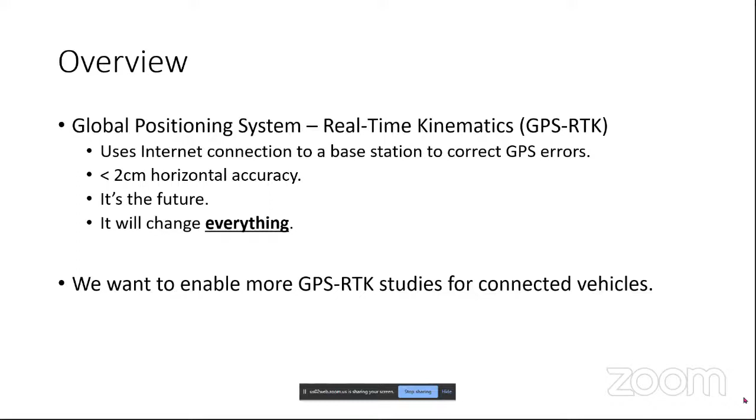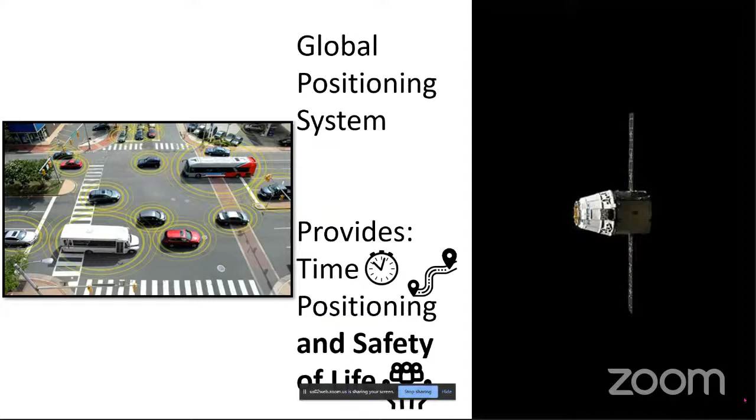So a little bit of background on GPS. We should all know this by now, that GPS provides time and positioning, all from the satellites whirling above our heads. But now GPS is going to provide a safety-of-life component when it's tied in with our connected vehicles. So those of you that don't know about the basic safety message, which was standardized by SAE a long time ago, they put GPS right in there. You can see the positional data for latitude, longitude, elevation, and positional accuracy.

GPS is so critical for the performance of our CV-DSRC radios, not just from the positioning point of view, such as am I going to hit the other car or not, or can I have preemption at the right time or not, but also for the actual lower layer where the radios communicate so they don't talk over each other. So GPS is very, very critical.

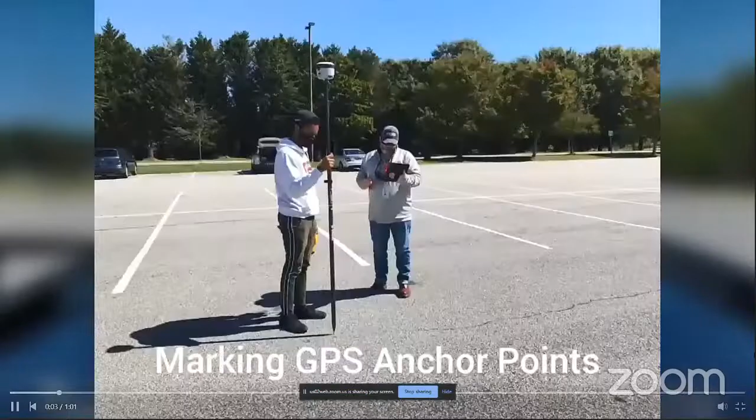But for this talk, we're going to talk just about positioning. We did a little study later last year, just asking, can commodity GPS be used for connected cars? So what we did was we went out to the Cobb County Safety Village parking lot, and we just did some basic tests where we took some anchor points with a very expensive high accuracy system, and we started driving through those anchor points.

So all those cones, we actually got really, really high precision markings there with about an $8,000 to $10,000 equipment loaned from the City of Marietta Water Department. And then we strapped onto our logging equipment just a basic USB GPS dongle, put it on the roof.

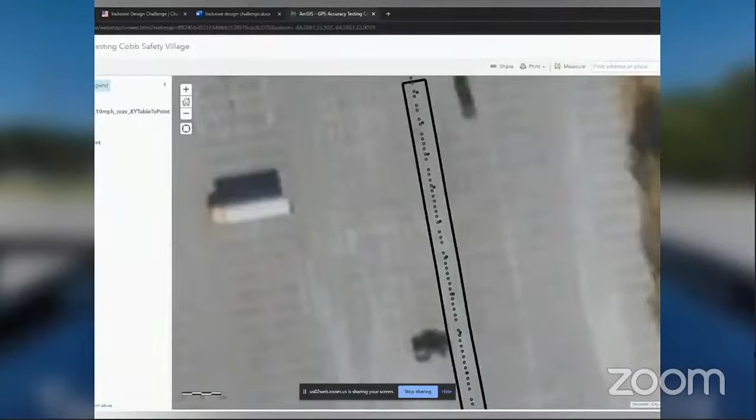We wanted to compare it against an accurate GPS module found in an older DSRC radio. Notice we had a clear sky, and we drove the car through the points, and that's what we care about. The black box there was where our anchor points were, so we looked at where our points actually landed. We can go to a zoomed in spot here. All the little light dots, that's from the accurate GPS, and the dark dots, that's from the commodity GPS.

What we wanted to make sure was that there wasn't any positioning falling out of bounds of this black rectangle here. So that was pretty cool. It's like, wow, okay, maybe commodity GPS isn't so bad after all.

But we wanted to go a step further because we started hearing about this technology called GPS RTK, which provides less than 2 centimeter horizontal accuracy. This is mind-blowing, okay? Let's look at the use cases as defined by the 5GAA. They did a wonderful study, put out a great white paper. I highly recommend, if you're into this stuff, to go read it.

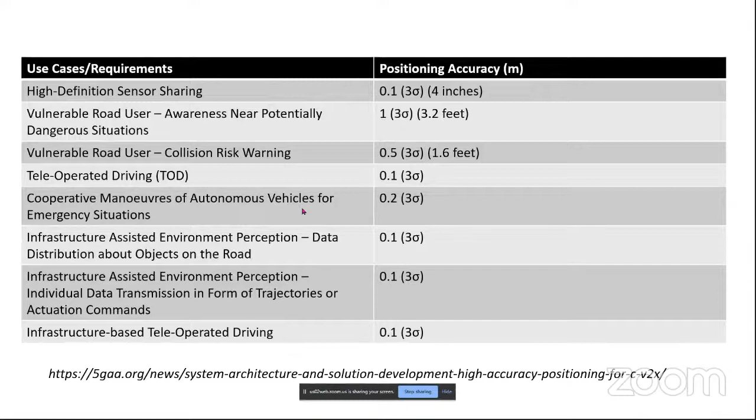When you hear RTK, just think that the GPS modem on the vehicle is making a phone call to a base station asking, hey, this is the position I'm in, does that look right to you? And the fixed base station will talk back over the internet and say, yeah, that looks about right, or no, you're off a little bit, here's by how much.

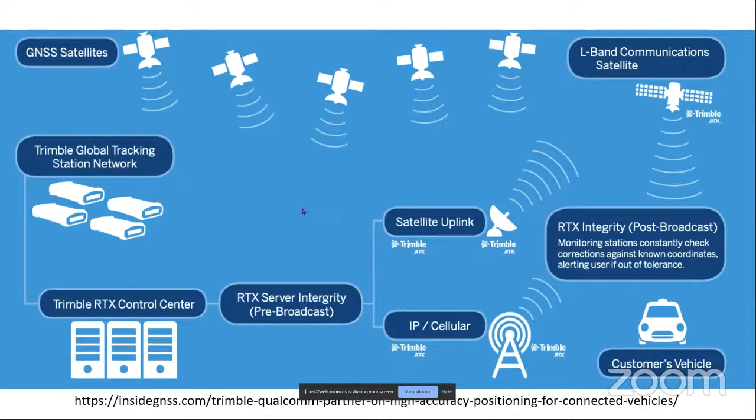So at a very high level, this is what you can expect for connected vehicles. You have a fixed base station that you're driving by, and it's talking over the internet and sending those correctional data to the rover part, which is what we call them rovers when they're actually on the connected vehicle. You can receive those through any type of communication link as long as it's connected to the internet. So it could be a CV2X RSU that's deployed, or it could be a cell base station going over 5G, 4G LTE, even 3G.

This is very low data rates we're talking here. These correctional messages, you're talking about 2 to 6 kilobits per second, okay, is all you really need. So it's a very, very low bandwidth requirement.

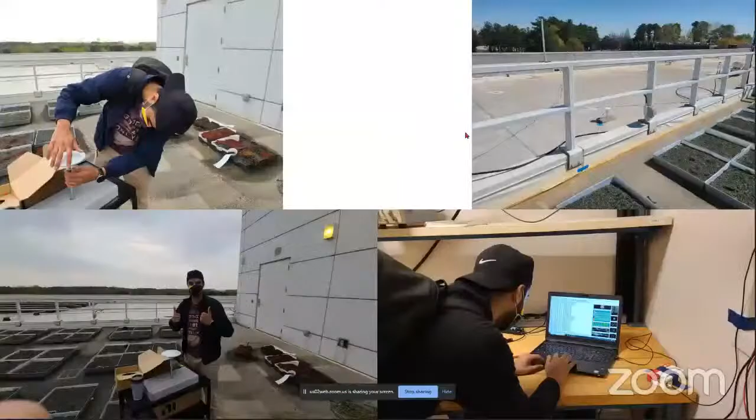Now let's go ahead and set up a base station, an RTK base station. There's my student Mohammed, he worked with me this semester setting this up on our engineering building. And boom, look at that. That's 14 millimeter horizontal accuracy with just a cell phone and a $220 external GPS receiver. And the base station wasn't that expensive either.

So this is what we're talking about. Actually, this data point was done with a little deployment outside of my garage. That's how accessible RTK is, and this is why it's a big deal for us in ITS: these high accuracy position services are no longer $8,000, $10,000 a pop. These things are coming down to below $500.

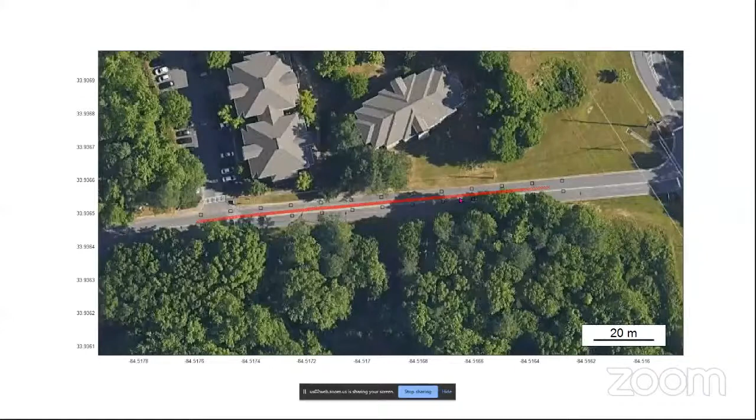By the way, as we know, all the chipsets are based on the Qualcomm 9150, at least as far as I know right now. I'm sure there are some other reference designs, but the GPS for CV2X is built into the actual chip - it's not an external component. You can kind of see where it's doing some interpolation here, trying to estimate where the car may be.

And then right here in the middle, this is where the RTK system is. You can kind of see the big difference here: you are lining up almost exactly in the middle. I'll keep flipping through here. When you go back and watch this later, you can pause and look at the slides and compare against some of these other commodity devices.

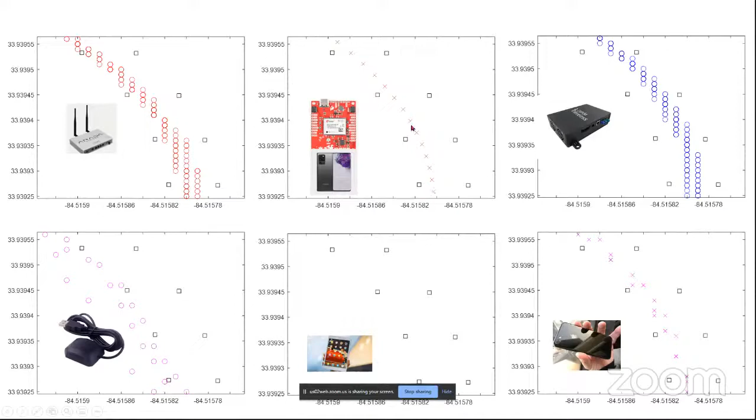So here we are around a curve. Again, RTK is just rocking really well. If you zoom in a little bit, you can see how our CV2X radios are kind of interpolating here. So there has to be some extra post-processing, whereas with RTK, you just get immediate behavior there and very high accuracy. And then finally went up a hill - again, we're tracking really nicely, even on an incline, which is pretty cool.

So going forward, we want to deploy more base stations. We want to study the expected coverage here in the Metro Atlanta area. We want to study these corrections over a CV2X RSU. And then we also want to apply this technology for dynamic work zones, where someone takes that monopole out there, marks high accuracy positions for all the traffic cones, and then the RSUs broadcast those to autonomous vehicles.

Anyways, that's my talk. Thank you so much, and I look forward to hearing some questions.

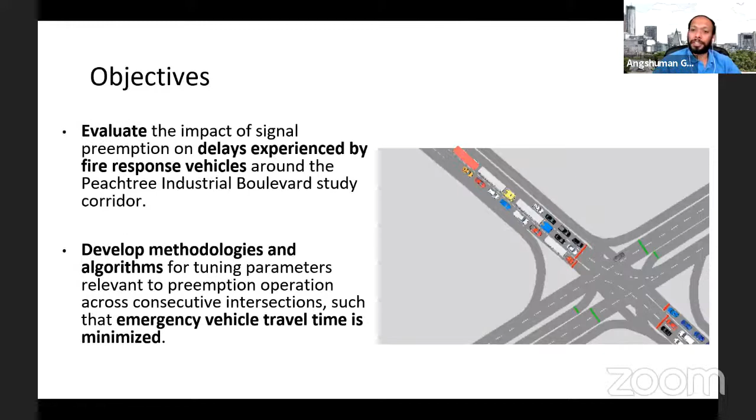To understand how much impact there really is from holding the greens, we went with a simulation approach. We built a software-in-the-loop simulation with exactly the same signal controls that are operating in the field. We calibrate and validate the model, create and test the baseline scenario with naive preemption, and then test multiple different scenarios to figure out a strategy that will give the optimal solution.

Our VISSIM model covers a 6-mile stretch of PIB, Peachtree Industrial Boulevard, between Holcomb Bridge at the south end and Pleasant Hill on the north end. It also includes some signals one intersection away from Peachtree Industrial Boulevard, as you can see here. So there are a total of 25 signals in the model.

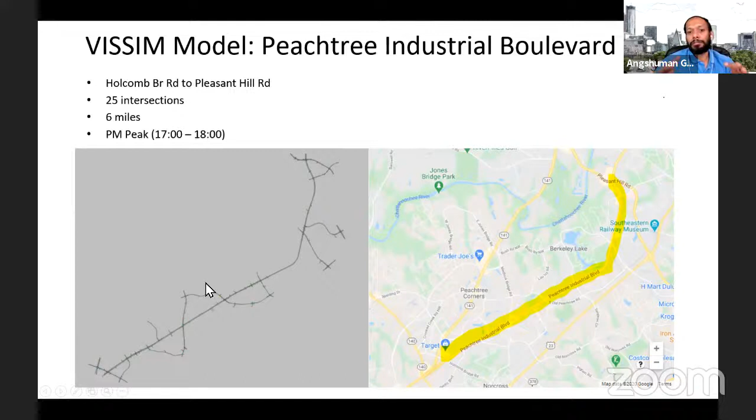We are modeling the PM peak to begin with. For calibrating the model, we used volumes to begin with. We obtained historic volumes from multiple sources for this purpose, including counts by processing the on-off signals received by the loops, by the signal controllers from the field detectors.

This data was obtained from the MaxView database, which contains the 10 Hertz data of signal controller events. This was supplemented by volume counts from the ATSPM system maintained by GDOT. However, we have count loops only on the main line in most cases, so the volumes on the main line were calculated from these count loops and were accurate, especially for the through movement.

But the volumes on the side streets came from presence detectors, so we expect them to be underestimates of the real volumes. So we supplemented this with historic turn counts, which were available at some intersections but not everywhere.

Once the calibration with the volume was done, we also calibrated the model with travel times obtained from the INRIX data, which are probe vehicle data. Next, we validated this against some GPS data we collected back in 2019 before the pandemic.

We had deployed some equipment in 17 of the emergency vehicles from 6 of the fire stations around this corridor. These were deployed over a mix of vehicles, including fire engines, ladder trucks, and med units. These reported GPS data every 2 seconds, so we had very high fidelity data over a 2-month period.

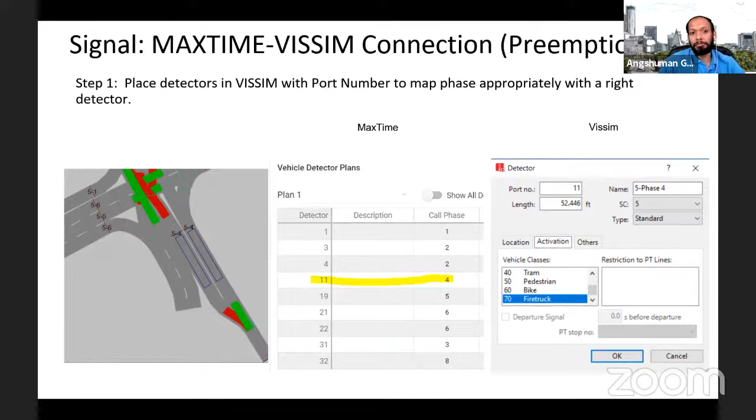Here's a short demo of how it works. On the left, you see the VISSIM interface and the vehicle movement at the intersection. On the right, you have the display of the signal state in MAXTIME. In VISSIM, you can set up the signal state visualization as well to see the signal state. Right now, we have the green on phase 2 and 6. There's no preemption call.

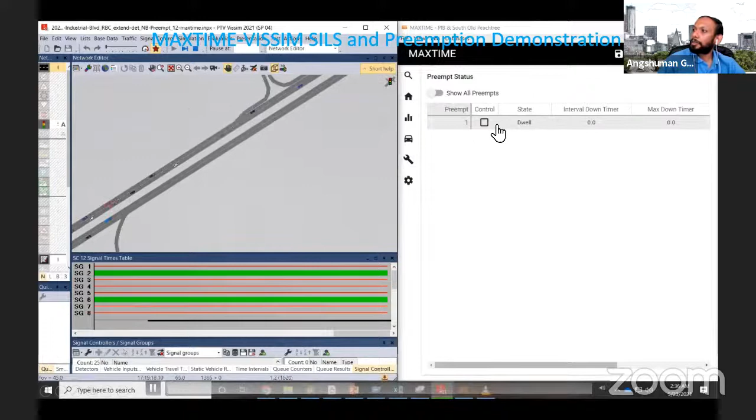If we give it a second, we'll soon see a preempt call coming up. I'll let it play out. Or maybe just move it forward. So here, once the preempt call has been placed, we're moving this here to find this emergency vehicle. The yellow one is the fire truck there.

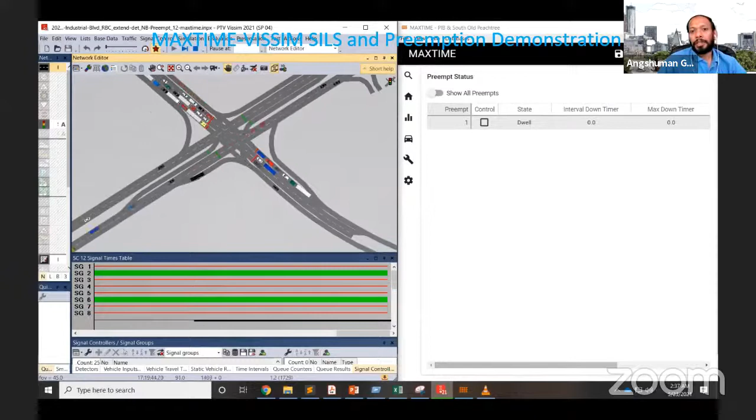Based on the limits of the DSRC radio, we made the detector about, so right now it's the whole approach to the intersection, but we're going to reduce it to 1,000 feet. As the engine crosses the intersection, we'll see that this preempt call will go into the exit phase started mode, and then it goes away and the signal goes back through the recovery and resumes normal operation after that. For our model, we did a preemption in VISSIM as well.

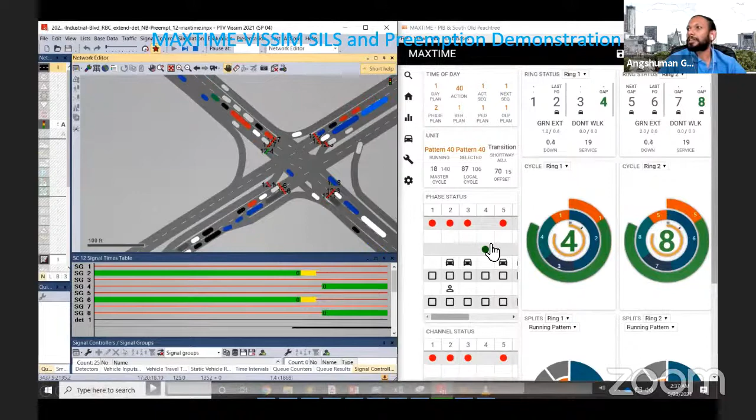Okay, this started playing it all over again. Let me see if I can go to the next slide. Yeah, skip through that. So this one is a demo using VISSIM's RBC, the ring barrier controller.

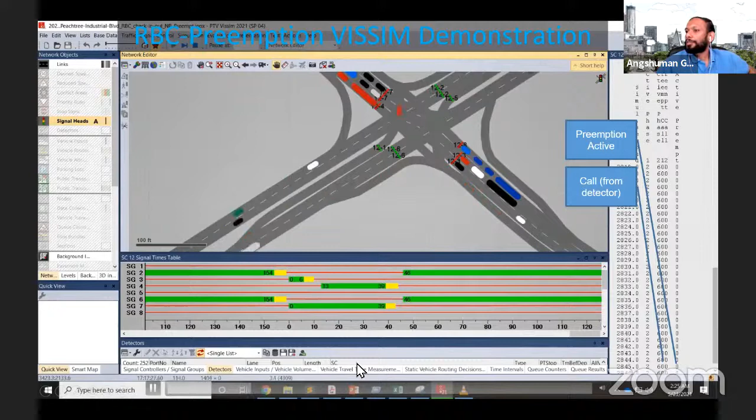And if it cooperates and plays, there we go. So in this one, we can see the call from the detector in this stream and the preemption active right here. I'll move this forward a little bit so we can see the detection come up here. You see a 1 here, and it goes into the preempt. We'll again see the emergency vehicle in here. There we go, that's the yellow vehicle.

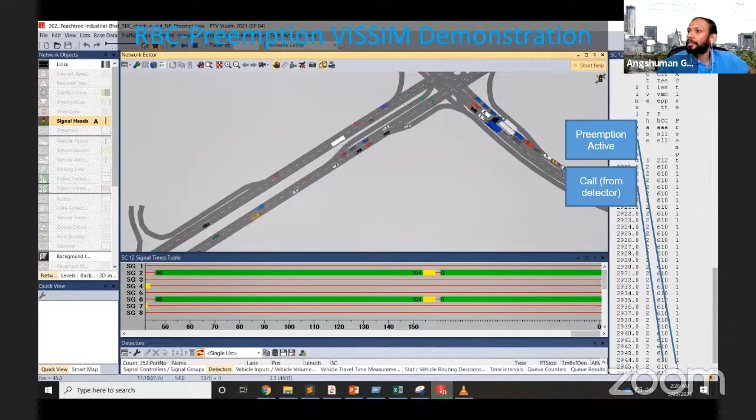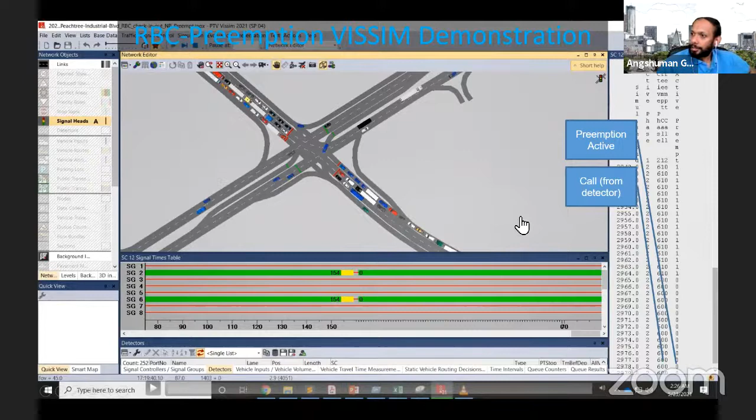And in this one as well, we'll see that as the vehicle crosses the intersection, the detection goes away, followed by the preempt signal going away, and we take the green away from phase 2 and 6 and give it back to the other cross street. All right, let me keep going.

Sorry. So next, here is a comparison of the trajectories of the emergency vehicle going through the corridor. As expected, you'll see that the vehicle avoided getting stuck at the intersection with the preemption. On the left, this is without preemption. On the right, it's with preemption. So we see that the vehicle avoided this red in the case with the preemption.

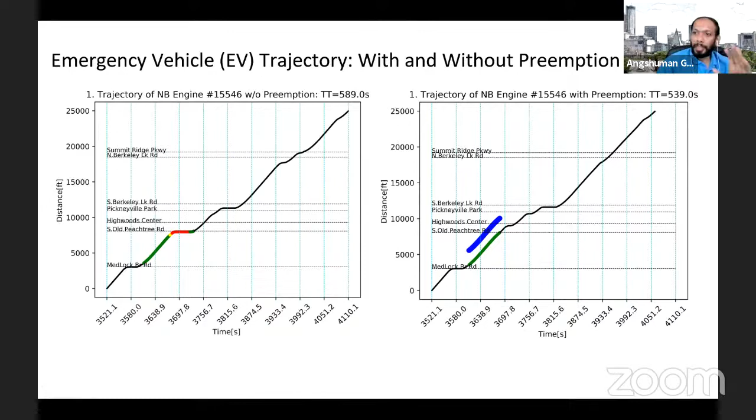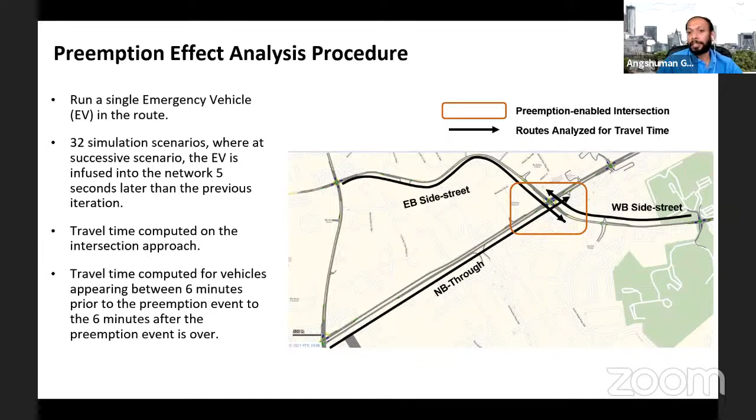And just a sanity check to see that what we are doing makes sense here. So we did several runs to put some confidence bounds on the travel time savings with slightly varying conditions. We made one vehicle go through the signal by approaching at different times within the cycle. We computed the savings limited to the travel time on the approach to the intersection and within about a 12-minute window around the time the vehicle crossed the intersection. So it's a box plot of the travel times.

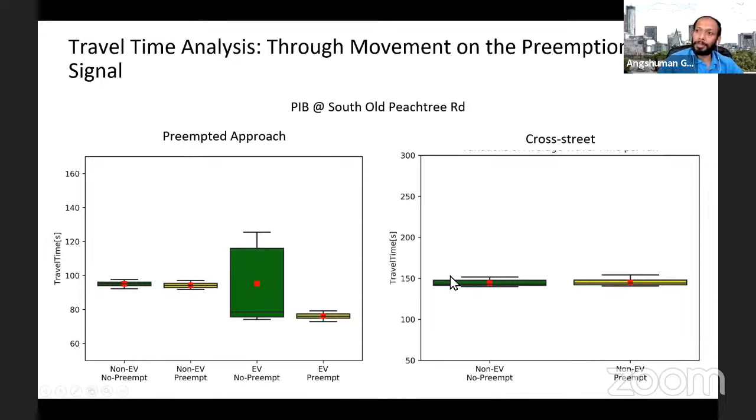Next steps: we are going to add the preemption, or enable it, at all the intersections on the entire corridor, complete the baseline, and study different scenarios for making the system dynamic by making the time of start of the preemption responsive to the estimated queue lengths that need to be flushed ahead of the emergency vehicle, instead of the static approach we have right now with fixed detector lengths. All right, I will stop there.

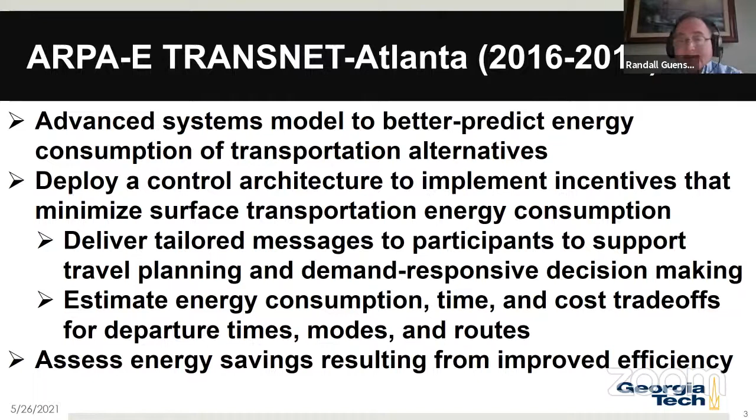So we had to estimate energy consumption, time, and cost. That's the cost of owning and operating your automobile, the cost of your transit fare, the cost of parking, and all of those were included in the model. When we talk about the Dijkstra algorithms and the use of impedance, those were costs that were all included. All the costs were converted to time, and then we'd assess the energy benefits from providing these incentives.

The traditional shortest path routines that you get, like when you get into your car and ask your app, give me the shortest path to work, and it says it's going to be 30 minutes by this pathway. The problem with a lot of the apps is they're using current speeds reported by travelers, what we call streamlines on the network, and projecting your travel time based on what people are currently experiencing. That gets us to the 30-minute commute dilemma where, 10 minutes into that trip, you look down at your app and it says it's going to take you 30 minutes still. That's because congestion wasn't explicitly accounted for in the algorithm.

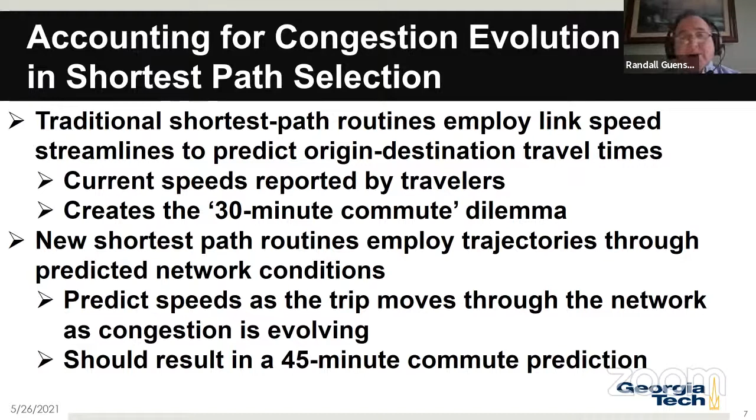So newer shortest path routines are employing trajectories through predicted network conditions, so that on your pathway, in deciding which route you're going to take, if you've got a 40-minute travel route, 15 or 20 minutes into your pathway, the app is predicting what congestion you're going to be facing on that route. Congestion could be forming, but could also be dissipating. There's no reason to take a longer circuitous route if congestion is going to dissipate by the time you get there. So the idea is to predict speeds that are changing in the network, and hopefully, in this case, when you ask your app, you get a 45-minute prediction.

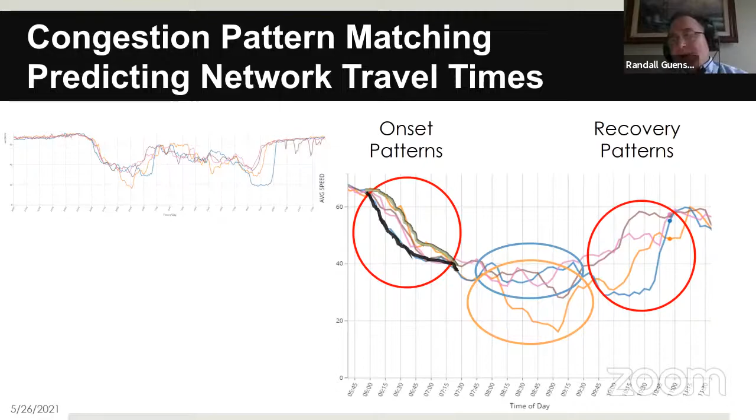Now, congestion does follow some predictable onset patterns. I've got to thank Guin for this slide. Guin works a lot with the Navigator data. We have a repository getting the 20-second data lane by lane. You can mine these data sets to look at how congestion is forming and how it's being relieved. The concept here is, if at 8:10 I see congestion upstream on two freeway links that's starting to flow backwards towards my location, I can know in advance that by 8:30, since I've seen this happen over and over again, it's recurrent congestion, that I'm going to be driving at 20 miles an hour on that stretch.

And so that brings us to the regional space-time memory that we developed for the ARPA-E project.

It's a repository of on-road operating condition data. It's at 5-minute resolution. It doesn't really do any good to go at a more refined level than 5 minutes. Traffic signals and signal timing and all that kind of prevent you from doing anything useful if you go down to the 1-minute level. And we're retaining all of this data link by link.

The cool thing about the overall space-time memory is it's structured so we can take data from any source. In other words, with machine learning applications, we really don't care where we get the data. What we care about is how good those data are for predicting future conditions. So obviously we have the navigator data feeds that we're getting for the freeway links.

We have some arterials that come in there. We worked with AirSage in one of the projects using cell phone tracking data for speeds. Bluetooth and wireless monitoring data can be integrated. We even can bring in second-by-second data from an instrumented fleet, process that, store it, which we did for the Commute Atlanta project before that.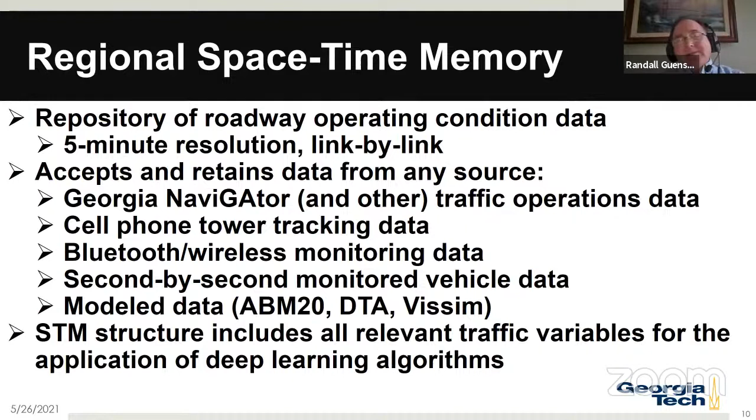And then bring those speeds in as observational speeds. But also another important thing is you can use modeled data. So we can use outputs from travel demand models, dynamic traffic assignment, microscopic simulation to look at potential conditions that we haven't seen in the data set yet that we believe could occur in the future. And we're tracking all the relevant data fields that we need: speed, volume, fleet composition, and the like.

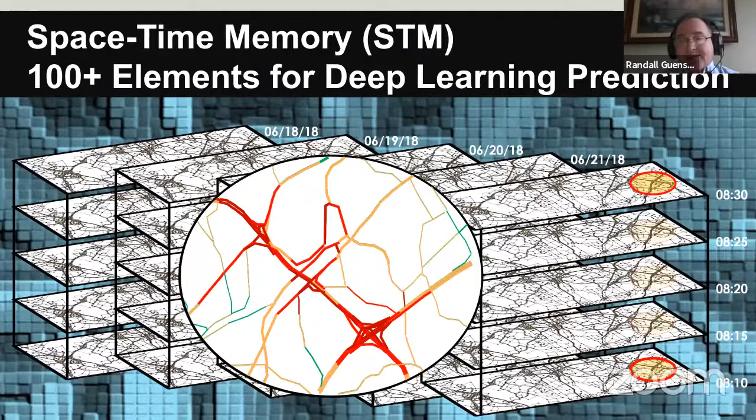And so the idea is that, at 8:10, I'm seeing these conditions on the roadway, but I'm also seeing what happened in 5-minute slices beforehand, and I'm projecting what those travel times are going to be moving through the system. So now, instead of using the streamlines, I can actually use shortest path algorithms that move in time and space through the space-time memory. We use for this the roadway sim and transit sim modules that we developed.

These are just Dijkstra algorithm processes for networks. We were using the 203,000-link travel network for the Atlanta Regional Commission's ABM model. That was a 2015 version. We're at about 150,000 links now. We're getting that all set for the next project.

We also brought in all of the MARTA fixed rail routes and bus routes and express bus routes so that we have connectivity between these networks. Roadway sim and the STM, which is projecting congestion over time.

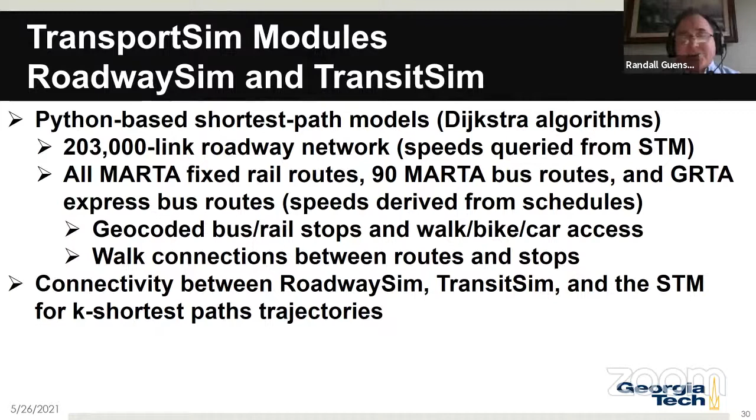We kind of cheated on transit sim. We just assumed that the buses followed their schedule and there was enough padding built in so we didn't also have to try to bring in the congestion with the transit, but it's something that could be done in another iteration. And so for ARPA-E, we use the space-time memory to do predictions of alternative routes, alternative departure times, bus.

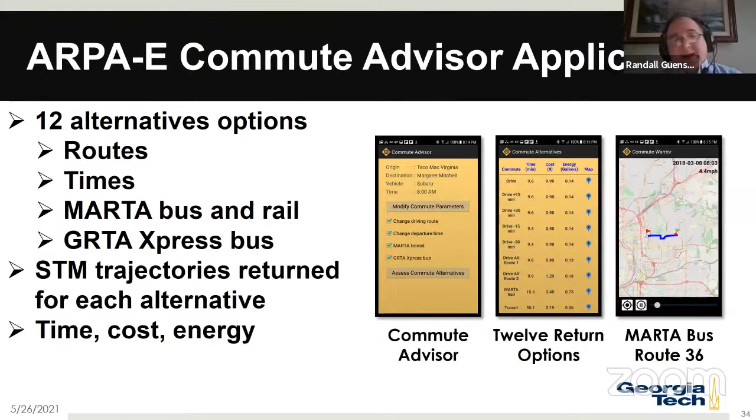And both park and ride and transit-only options. And you get the STM trajectories that are returned, and we can calculate the time, cost, and energy for each of those. And so, for example, for a commute from Sandy Springs to the Bank of America building, your Route 1 direct drive to work is 26 minutes.

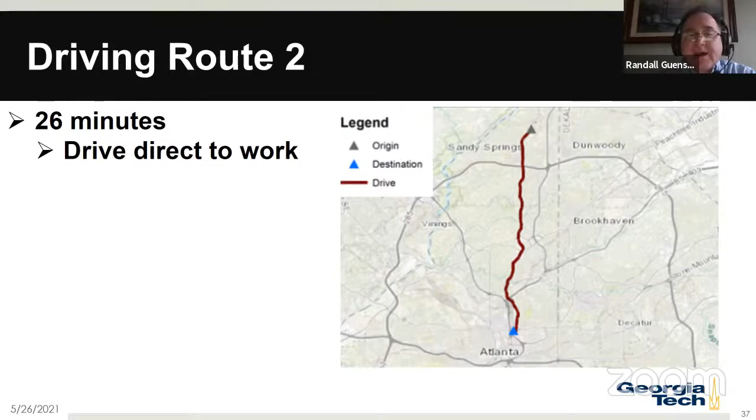Your Route 2 alternative is also 26 minutes. It's a slightly different route when you reach the 75 and 85 Y there. And then you have a one-transfer route on transit only. That's 44 minutes. That's walk to bus, ride on the bus, walk to rail, ride on the rail, walk to work. Here you've decided to walk to the rail, so it's a 70-minute trip.

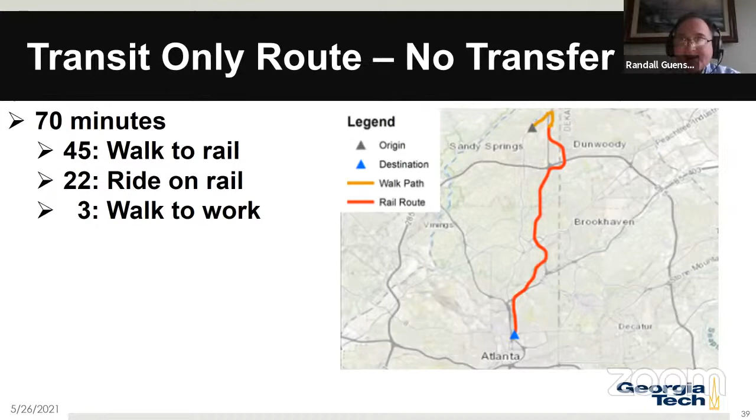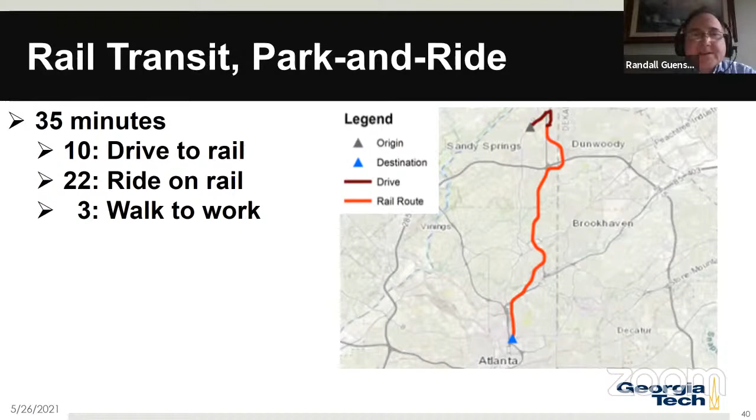And I took out the express bus option, which sends you out up 85 past Brookhaven to catch an express bus up there, because there isn't one that serves that travel. Here's one by Park and Ride, which is 35 minutes. So that's kind of that reasonable compromise between driving directly at 26 minutes and taking your transit-only options.

So Sidewalk Sim is essentially another shortest path calculator. It really doesn't matter what network you have. It can be a communications network, a pipeline network, a roadway network. And in this case, what we're doing is we're developing the pathway network for sidewalks and pedestrian pathways, so the places you can walk or roll a wheelchair.

And we're incorporating sidewalk features with this. So it's not just the sidewalk links, but it's ramps, curb cuts where the driveways come across the sidewalks, crosswalks, and their relevant attributes, both in terms of design standards and condition data. So, is it traversable by a wheelchair?

This is the thing to think about, because we're headed into this ITS for Us project to work with the disability community on shortest path, complete path routines to get from your home all the way to your building and inside the building you need for a public service. Same procedures, same model really, just different cost functions.

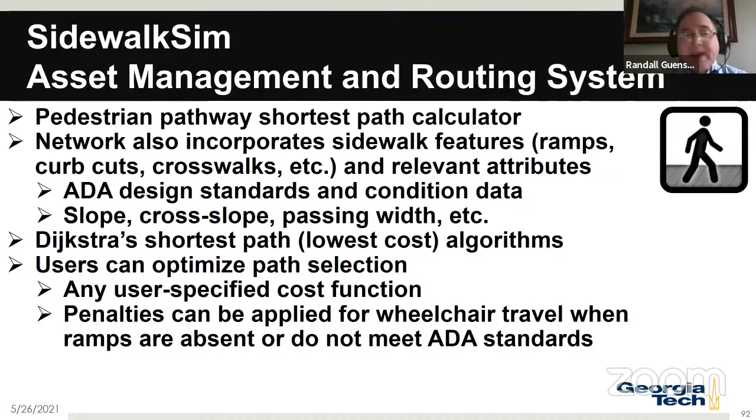So now instead of just travel time on the links, you can bring in cost penalties for ADA design standards that are not met, or sidewalk conditions that are impassable or difficult to pass by a specific ADA mobility mode.

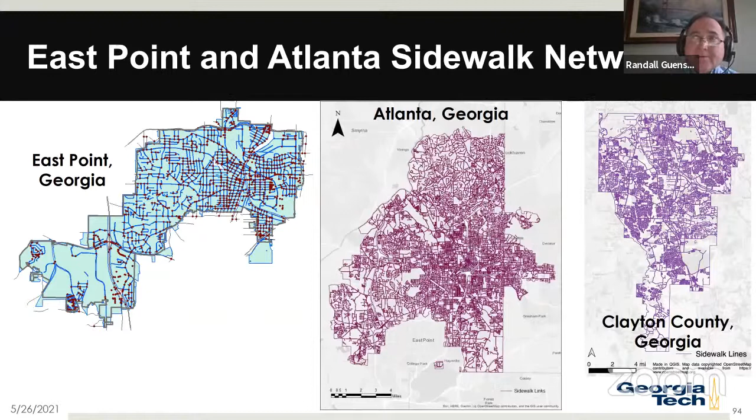We've developed networks for East Point, City of Atlanta. We just finished the Clayton County, Georgia network, and we've done some for Cobb County. We'll be doing the network for the southern end of Gwinnett County for the ITS for Us project.

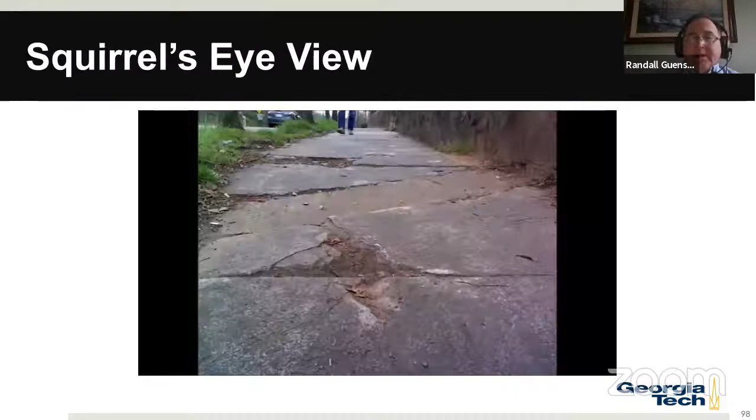Once you have your networks, you've got to inspect them. We have a couple of different tools we use for that. One is Sidewalk Sentry, a rolling video setup where we can record information about the sidewalk.

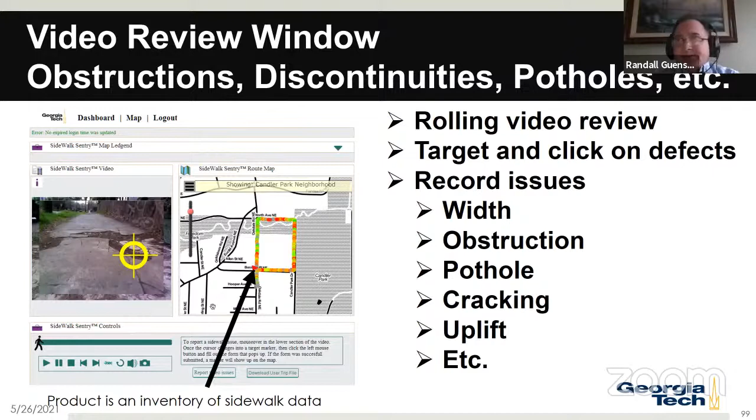You're getting vibration, XY position, and also a video archive. That video archive can be scored by reviewers, where you can identify problems with sidewalk width, presence of obstructions, potholes, or cracking—anything you want to ultimately assign a penalty to. We use the traditional ADA design standard specifications for that.

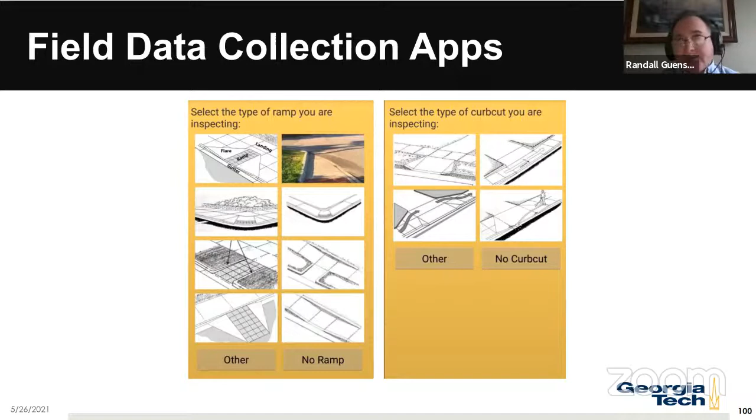You can also go out with other apps—this is our Sidewalk Scout app, which we use to inspect the ramps and curb cuts, making sure design elements like cross slope are acceptable. Cross slope is a real problem if you're in a wheelchair; it can send you turning towards the street as you're coming across the network.

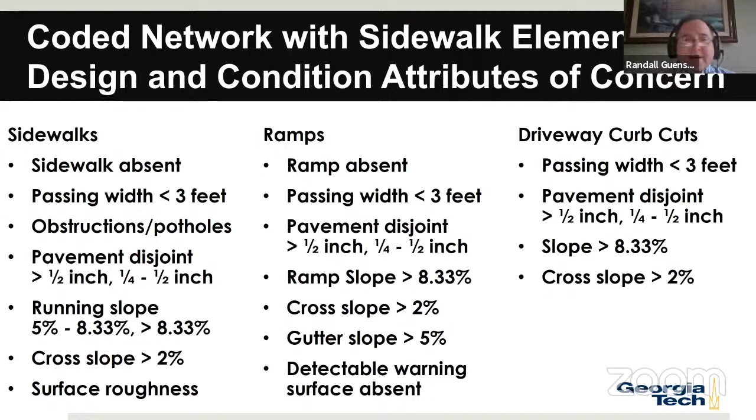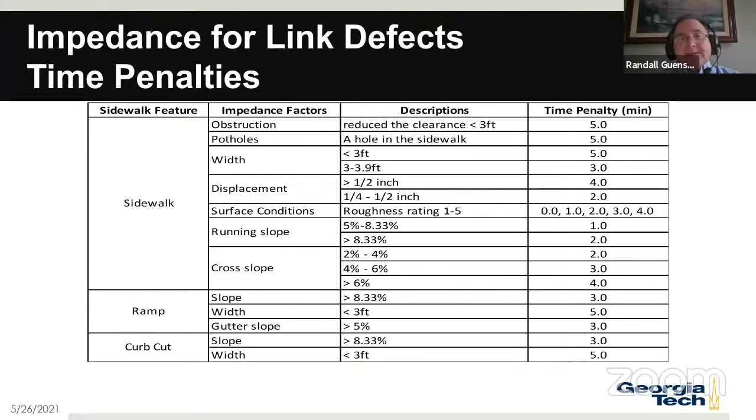As a demonstration, a grad student did this project in December as research last semester, looking at individual problems like inappropriate passing widths and cross slopes, and assigning time penalties to those. This is the application for the Ansley Mall neighborhood she did for her project. She assigned time penalties ranging from 5 minutes to 1 minute across all these different variables.

As a demonstration, she coded the network and assigned random penalties to these. We don't have all of these networks inspected, but we do have most of Monroe for the City of Atlanta project, so we can actually use the individual penalties for that.

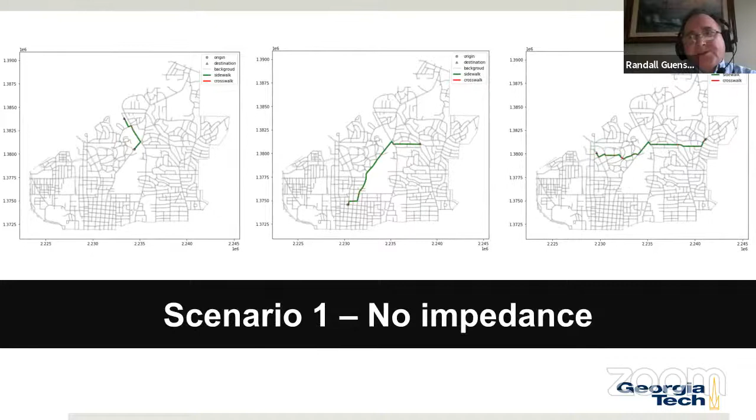But here she applied no impedances—this is just the impedance for sidewalk surface roughness, so you're not seeing too much diversion there. When you bring in all of the other impedances, though, you can see some real circuitous routes you might have to take to get around major defects that can't be traversed by a wheelchair.

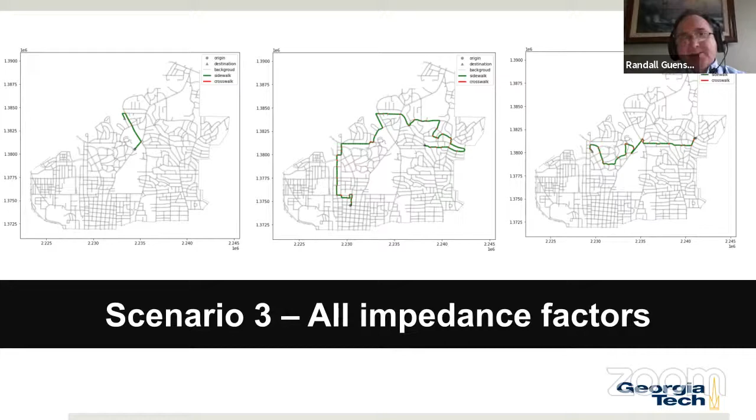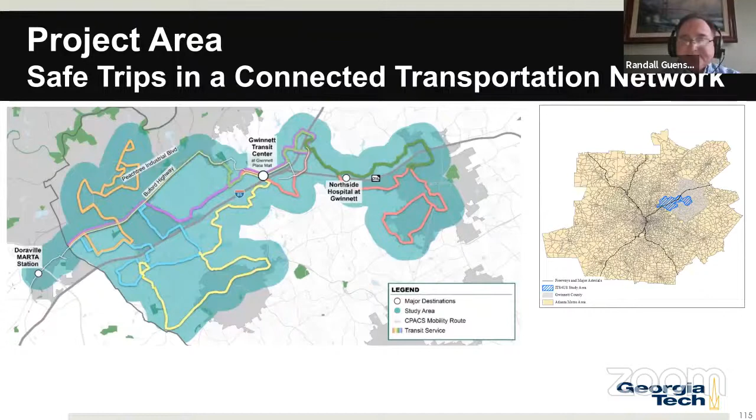To sum up, we'll be bringing both of these initiatives—the STM for roads and transit, and the sidewalk SIM network—into the ITS for Us project that ARC is running. The study area is up at the corner of Gwinnett County that crosses over into the Doraville MARTA station, covering both the STM element and the sidewalk SIM element.

ATL Rides and their app will be used for navigation, working with those contractors. It's a big team with consultants organizing and coordinating all of this work, but also bringing in all of the ITS elements into this as well. So with that, I will stop.